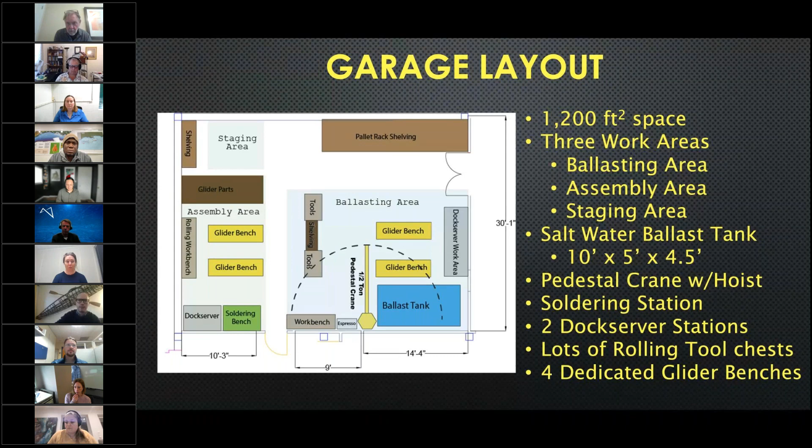This is what it looks like. You can see the pedestal crane there with the half-ton hoist. Our ballast tank, a saltwater tank, we keep covered. Underneath the workbenches we've got dedicated space for the vacuum pumps and tool storage so you're quickly and efficiently able to pull a vacuum when needed, without hunting for the standard tools to take things apart and put them back together.

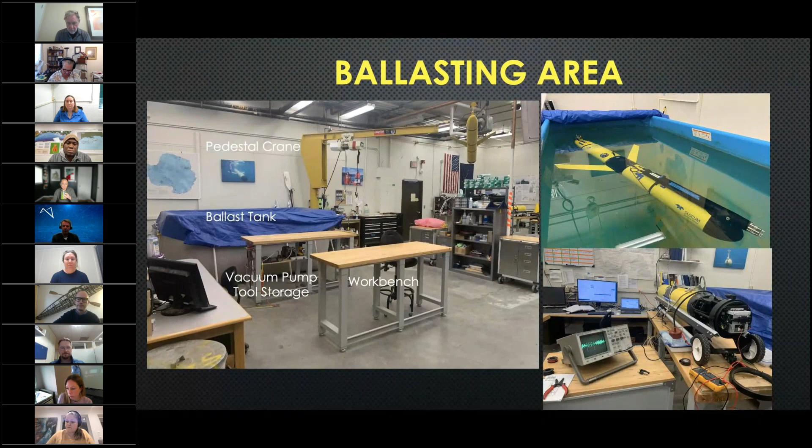In our assembly area, you'll see there are both gliders of the yellow flavor and of the pink flavor. We have small parts bins, a workbench, and all the shelving storage I mentioned. On the right side is the soldering workstation, heat guns, solder, fuses, spare parts, electrical tape and heat shrink. The staging area is dedicated floor space because the glider crates are enormous, and you need a place to put them while getting them ready for the field.

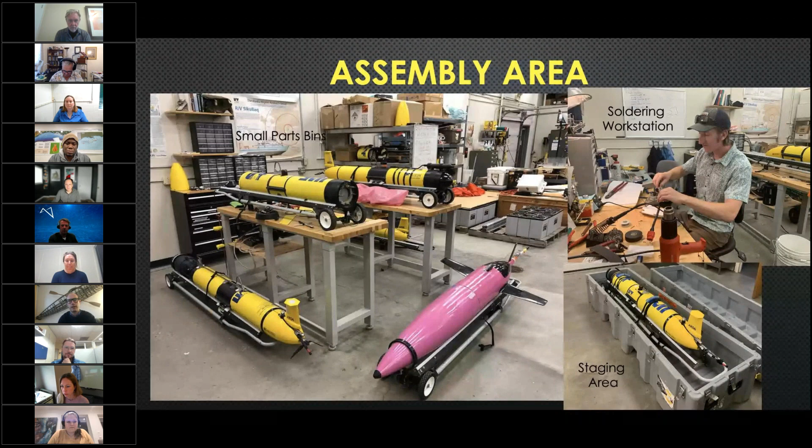If you're a new user, you're probably thinking, where can I find all this stuff? If you haven't been in the industry very long, it can be a daunting process. But places like McMaster Carr, if you look through their online catalogs, have everything you could possibly imagine to set up a new glider lab.

This pedestal crane is the exact same one we bought, had it shipped all the way up to Alaska, talked to our facilities maintenance folks, bolted it down to the floor, and installed the half-ton hoist on it. The total price, including shipping and the hoist, was maybe about $5,000.

The workbenches in my shop I bought years ago at a box store, Sam's Club, where they had just the perfect height and work surface for putting these things together. Places like Costco and Home Depot sell similar products that are fairly inexpensive but perfect for the task at hand.

My ballast tank is an indoor swimming pool with a water filter. I think we bought it through a company called FitMax. Intex and a few other companies sell the same kind of ballast tank. It's very effective—we've had it almost 10 years now. We bought several more that fold up and ship out to different locations if we need to do testing at a remote facility.

All the different electronic suppliers like Newark, DigiKey, and Mouser supply the very specialized tools and components you might need to keep your gliders running—things like fuses, Molex crimp tools, connectors, and all the different wiring harnesses.

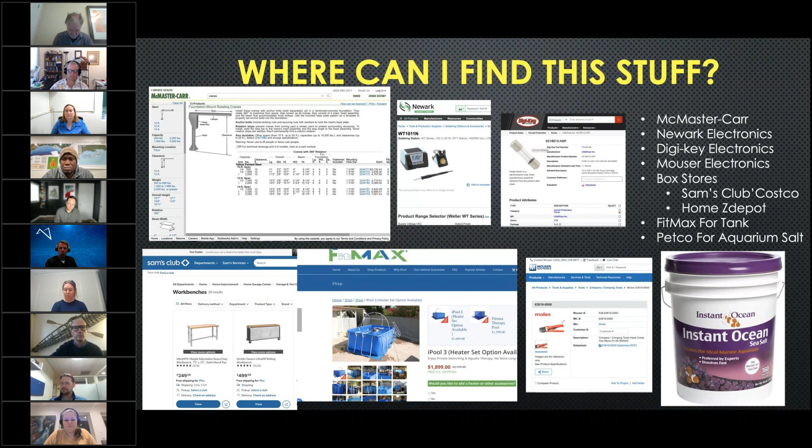So I've been working with a few different companies to design a snap-together HEPA filtration, climate-controlled clean room. They're fairly expensive, I think on the order of $20,000 to $30,000 to put in our lab.

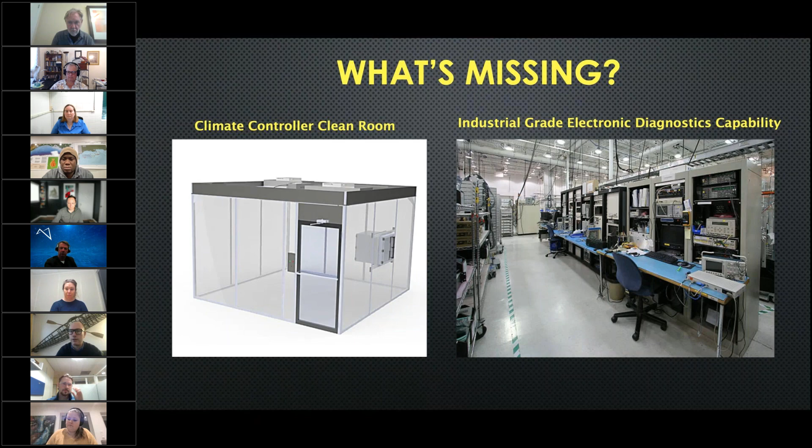And then the other thing that's missing really is an industrial grade electronic diagnostics center. I don't think that my university really wants to see us build something like this out. We don't currently have any laboratory facilities that are quite industrial grade. But I guess I'm going to have to continue to rely on the manufacturers to provide that capability.

And then just to round things out, we actually have one of these things in our garage. But if you know anything about Alaska, it's a pretty enormous state. And I am located directly in the center of the state in Fairbanks. So we have to travel about 400 miles to get to the ocean. So I'm kind of just making a little bit of a tongue-in-cheek joke here.

What's missing is the ocean, but we do have a marine field station, and down at our marine field station, we've got several sizes and classes of vessels. One of my favorites is just this large Zodiac that you can fit 2 gliders in. It's got a nice center console that we can easily get out to some of the fjords and deep basins in the Gulf of Alaska to deploy and test our gliders as needed.

So that's all I have for today. Let's see if I can stop this share. And I'll take questions if anyone has any.

So your facility down by the ocean, Hank, the lab is back at the university. Is that correct? The lab's in Fairbanks, and the marine field station is in a city called Seward, which is about 400 miles away.

Yeah, so every time we want to do kind of extensive testing, we essentially do all the ballasting in our lab and then prep things to get shipped down to the field station. Once we're down at the field station, we have a smaller lab. It's not very permanent, but it's a benchtop space and a ballast tank essentially. But we don't have the overhead hoist and the crane, so it's not perfectly set up at the moment.

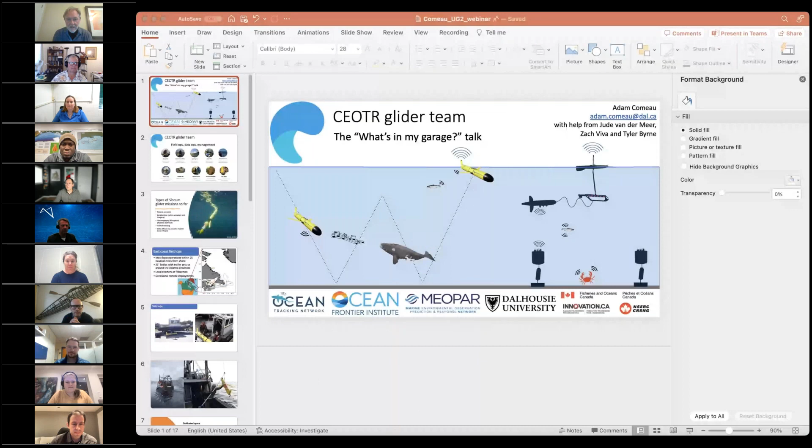Thank you. Thank you very much. Can you see my full screen? Do you see the notes or anything? Yes. I don't see the notes. I see your slide. Okay, perfect.

Well, I'll get started. Well, thanks everybody. Thanks for inviting me. Yeah, so I represent the CEOTR glider team. I manage the group. We're an organization that's funded by a whole bunch of institutions that you can see below, and we do glider missions for researchers.

But what's in our shop? We've got people. We've got a whole bunch of really awesome glider techs. We've got data people and management. Not all these people are dedicated to gliders. They do other technical services for the CEOTR group. But I felt it was important to mention that there's actually a lot of people in our shop sometimes.

And one thing that I'm going to talk about in the shop, you'll see lots of spare parts, kind of like what Hank was saying. Our shop, we do lots of different things. We do passive acoustics, we do lots of zooplankton missions or bio-optical oceanography stuff or animal tracking. And we try to make our gliders multi-stakeholder, so we're always changing things around. So I think that kind of drives why our glider shop is what it is. It's because we had to kind of adapt to the constantly changing gliders.

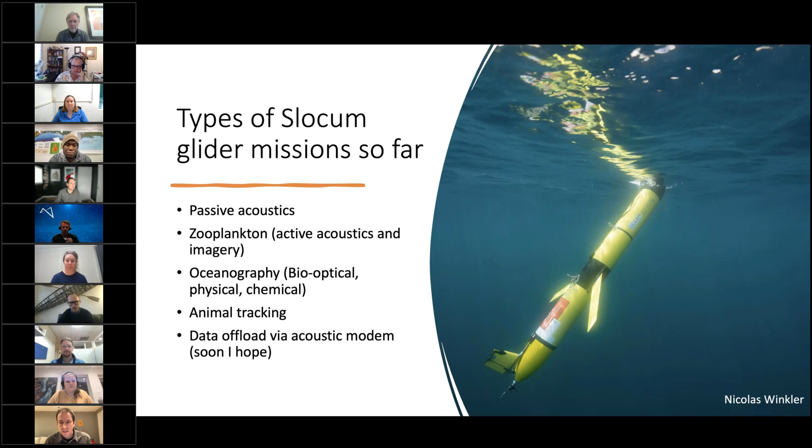So that's kind of the reasoning behind some of the things that you'll see later on in my talk. And then, just for context, another thing that guided some of our decisions is that we're mostly coastal operations. Most of our deployment and recoveries happen along the coast. And sometimes we will farm out a glider deployment to some trained fishermen or something like that.

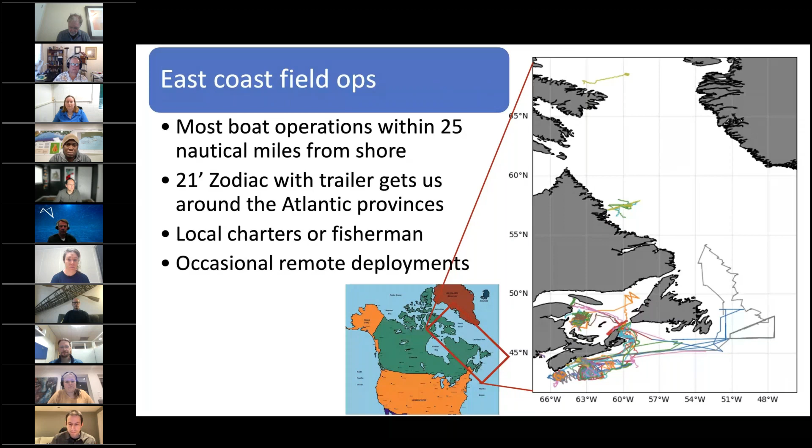This is just showing that sometimes we get fishermen to deploy, when we've got to go further offshore and need bigger boats and stuff like that.

Getting back to our shop, we've got a little bit less space than Hank. We've got 375 square feet dedicated to Slocum prep. We do have a mezzanine, I'll show you a picture of that, it's almost 300 square feet, like a floor and a half. We also have wave gliders that we prep as well in our shop.

We have the same issue with storage in terms of glider crates, those big Pelican crates. So we end up getting some storage shipping containers outside, and we put all of our crates in there because we don't have enough square footage to keep them inside. We also just recently purchased a heated and climate controlled container for storing excess gliders during times when they're not used, especially for the wave gliders, because they take up a lot of room.

It's worth mentioning, don't take these numbers purely - even though they're small, don't say that they're enough. We're constantly overflowing into our neighbors' space. Luckily, they're good neighbors and they don't mind, and they're not always using their space. So that's just a caveat to use with these numbers.

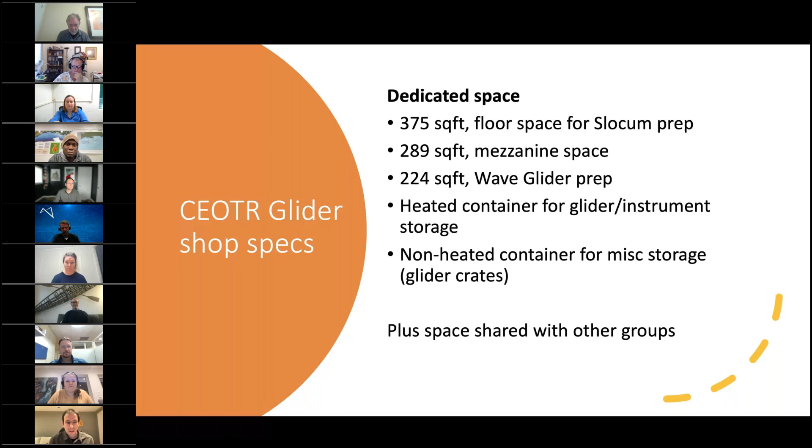So now we're getting to some of the images. This is kind of what we've got. I mentioned we have a mezzanine - this is just like a half level in our glider shop. It's been really good to store spare parts, boat supplies, the lithium battery cabinet, our server, that kind of stuff.

Underneath the mezzanine, we've got the ballast tank, where you can see we've got an electric winch, a hoist system to lift our glider from the ballast tank to one of our tables alongside. This ballast tank is a little over 10 feet long, filled with seawater. There's a little viewport in there, and that's pretty handy when you have instruments in there - one time it came in handy when we had a CTD pump that was clogged or the impeller wasn't working, you could actually look through the hole and see if there were any little particles flying around in it. It's a seawater tank, we have a running water filtration system in it, and we keep it covered because it gets pretty dusty and grimy if we don't.

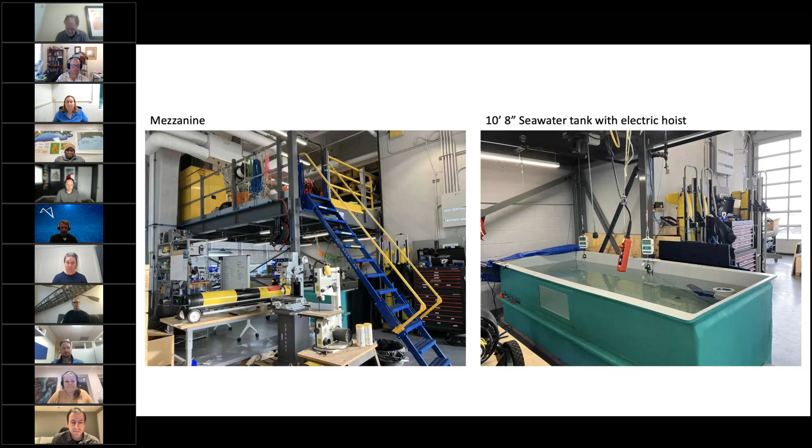Just like Hank was showing, I think one of the big things is storage. We've got lots of storage supplies for spare parts, connectors, wires, stiffener rings, pick points, all that kind of stuff. We've got a whole bin dedicated to Molex parts and specialized Molex pins and crimpers. This table on the right-hand side and our shelving system has got lots of ballasting supplies and scales and stuff like that.

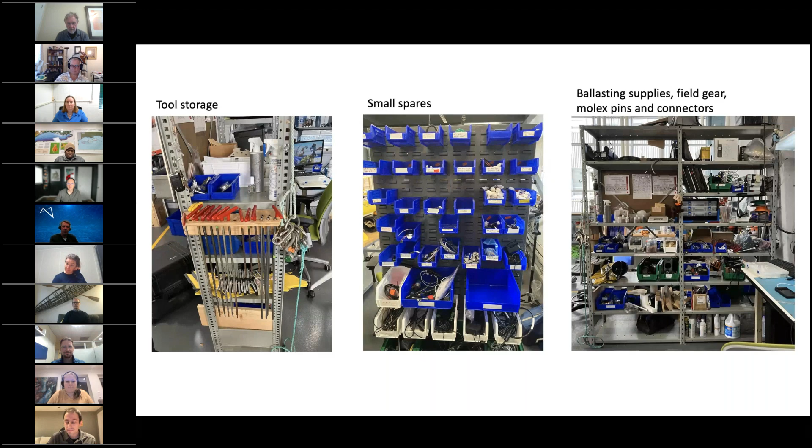We've got lots and lots of screws and hardware. Basically, we did the McMaster-Carr route as well, and we just buy one of almost everything that we need. A really handy thing we got early on - if you look on the left image around the right side, you can see this little weird series of black things, it's just like a ruler to measure out screw sizes, gives you thread count and stuff like that. It's been pretty handy. You can see on the right image here, lots of spares.

We've got spare science bays - that's been really helpful for us, so that if we need to change up the science sensors to do a new type of mission, we can just swap one in. We've got spare instruments, spare hull sections of different lengths for going in different water masses. Sometimes when we need to get the glider lighter, because we're putting in a heavy echo sounder or something like that, we put in a long hull. Spare stiffener rings, all that kind of stuff.

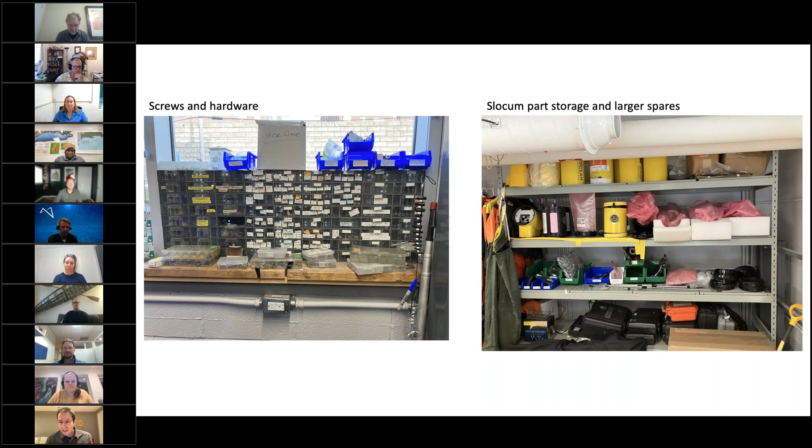We take advantage of our small space by having some vertical glider storage. This is just a picture of one of our racks - we can have 4 of our gliders stored like that. They're pretty easy to get a glider in, you can do it with one person.

It's pretty nice. We've got some 3D printers, as you can see we've got 2 different ones, and we've used them to 3D print little adapters and holders to either go inside the glider or externally mounted, sometimes in the aft cowling, to hold an optode or something like that.

So far, we've had 3D printed parts go down to 1,000 meters, which was a big success for us. We also use them for prototypes before we get the machinist to make a steel one.

We also have a battery storage container. This is pretty handy when we get lithium batteries in. We have a place to put them that's as safe as it can be, I guess, although I wouldn't want to see that filled with fire.

Sitting on top of that is just a big server that we've got. This is our shop server, and it's actually hardwired to several FreeWave modems, so that anytime we turn a glider on, it connects to SFMC, and we can just use it on any laptop connected to the same network. It's been really convenient not to have to do the FreeWave juggle or whatever.

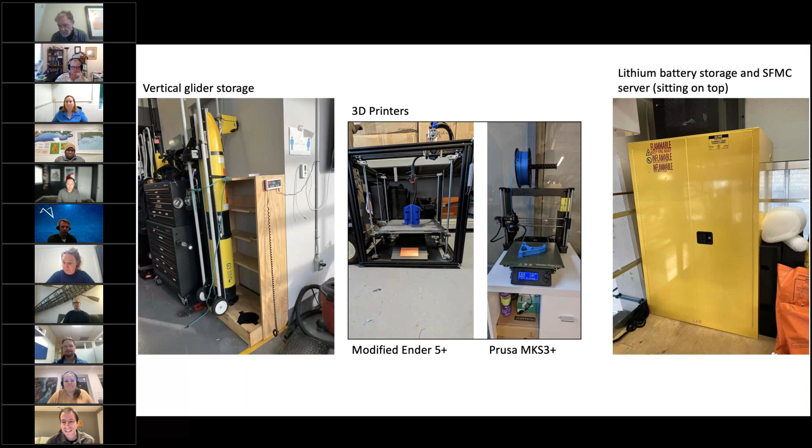Just going through, we've got some new pick point designs. Feel free to reach out if you're interested, we'd be happy to share these. They've been really handy to use as a gaff to recover your glider with.

We've designed these end caps as well that have been good to seal up science bays for pressure testing. If you're ever swapping a sensor in and out of an EcoPuck port and want to get it pressure tested, you can just slap on a couple of these caps and send it off. Luckily, there's a company just down the road from our shop that does this service for us, so it's been pretty handy.

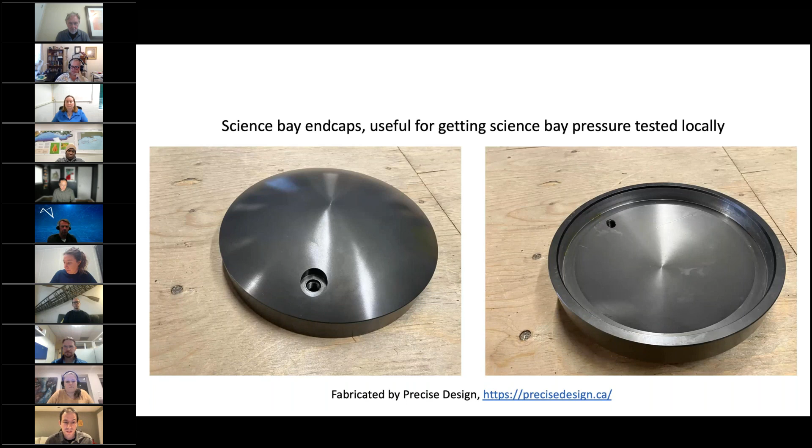And of course, running a glider shop, you need lots of friends, whether it's the pressure testing company or the local vessel charter companies. They've been great helps.

We've got a compass hut, a non-ferrous metal building that the Bedford Institute of Oceanography made for calibrating compasses that go to the Arctic. They've let us use it for Slocum gliders, so we've been able to hang them there and do the dance as well.

There's lots of local groups that have helped us out, including the Slack group here on the UG Squared.

Some of the issues keeping us up at night, just to generate some discussion, maybe in the Slack group afterwards: we've had lots of buoyancy engine leaks, especially with the 200-meter buoyancy engines, so talk to me if you've had some as well. Mission aborts, especially with the new STM32 system. Bias resets with Persistor gliders that led to some dead gliders in the water. And piloting, of course, keeps us up at night because you always get an abort at night.

We've got a new set of regulations that just came through. This is not Slocum glider related, but with our wave gliders. So if anybody's using wave gliders outside of the US, especially in Canada and the UK, feel free to reach out to us. I'd like to chat about how you got around these regs.

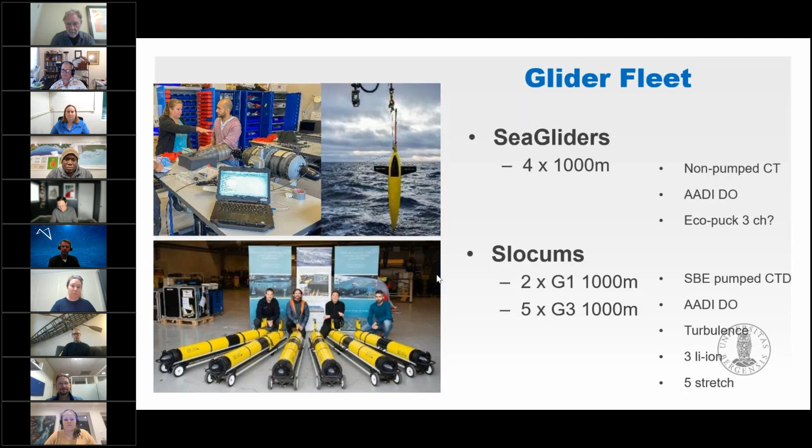So almost all of the Slocums are stretch gliders. 3 of them have rechargeable battery packs, and then the rest will just be the 4S battery packs.

Hey Landry, could you please mute? Landry, you need to mute. Thank you, sorry, I thought that was me for a second.

So I was saying there's a key characteristic of how we run our operations - almost all of our deployments are happening from large research vessels well offshore, and almost all of the operations are actually carried out by people that are not trained specifically with gliders. Quite often we get assistance from the IMR onboard technicians, and these people are fantastic because they have the right skill set, but they don't necessarily have glider experience.

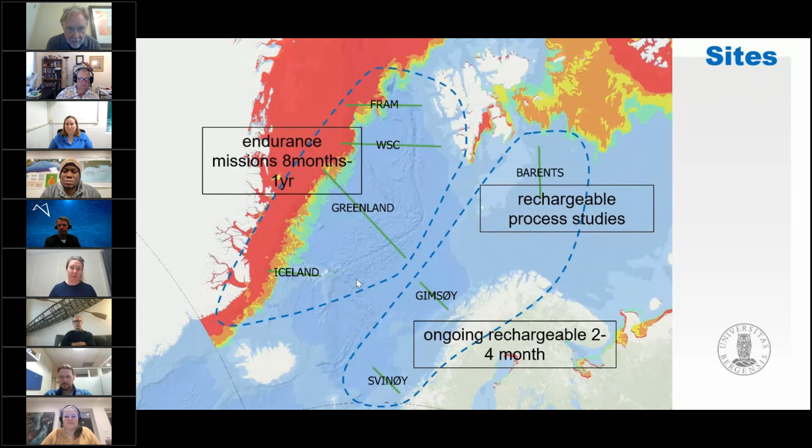So yeah, we spend a lot of time writing these procedures, and we're trying to make them as easy to understand as possible so these people can consume and understand the information as quickly as possible, to make their job easier and to make them more willing to collaborate with us. It also keeps our operational costs down, because we cannot send our own technicians off on these 6-week cruises whenever we want to deploy a glider.

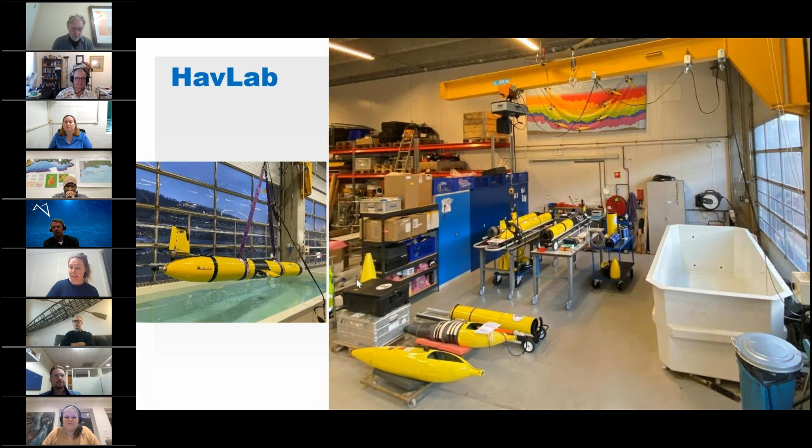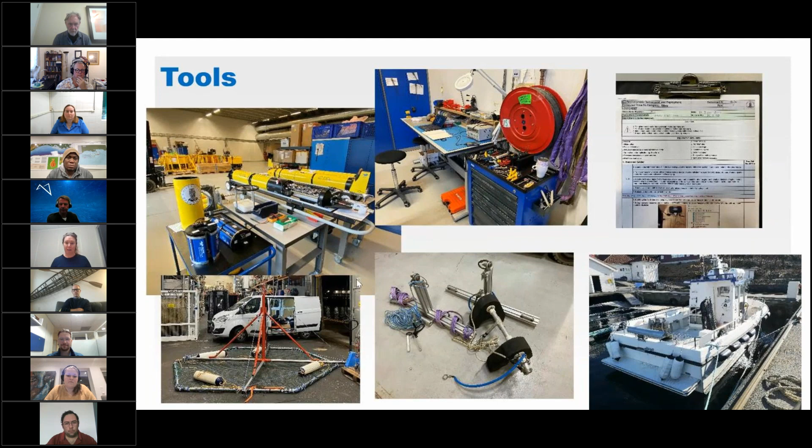On the left-hand side, there's a massive rig we've used in the past for recovering gliders. It's kind of a nightmare, to be honest - it operates really well, but it takes several hours to set up, so we're trying to move away from that. Beside that, we've got several rigs we use for deploying gliders from research vessels.

Field-going toolboxes are very much dependent on who is going to the field. If it's a glider tech, we expect them to be able to troubleshoot and fix a lot of things on the spot. For non-glider techs, we try to minimize the amount of equipment we give them because we don't want to overwhelm them - there's so much new information, and we just accept that everything has to run quite smoothly for the glider to be okay for deployment.

Going forward, I hope I'm not going too far over time, but Hank was actually just talking about this, so I'm jumping on board. We need more technical knowledge, or we need to be able to deal with more advanced repair jobs. I think all Slocum G3 users have been having issues with the HD pumps, and servo motors are always a problem. We need additional training going forward, or just more communication within the group, because people are working on these things.

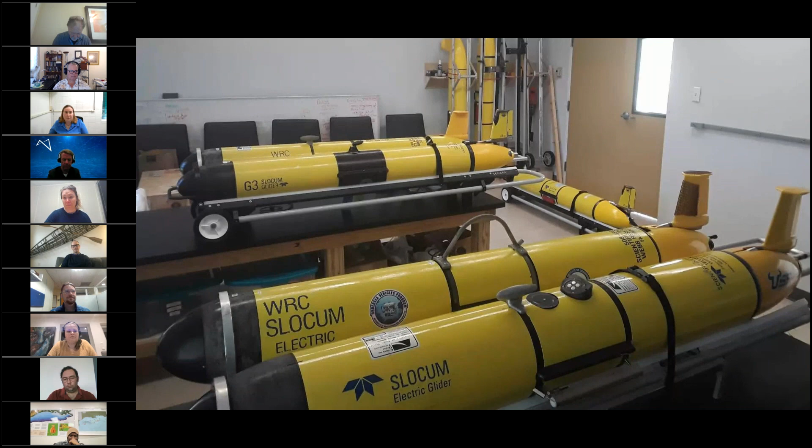Again, we have quite a few partners for our secure missions. We have a pool of about 19 pilots from 5 different universities with varying levels of glider knowledge. That counts PIs that will pilot, technicians, students, interns, and part-time employees.

We'll post a schedule a week to 10 days out with a specific person who's on watch and a supervisor for that day. We utilize Slack to share messages. Whoever is scheduled to be on watch is the one and only person at the helm, who will be sending commands to the glider should it need manual commands during its mission or if it aborts. Other people can log in and watch, but this reduces any confusion as to who's going to talk to the glider.

We also do post mission handoffs or post watch handoffs every day, so we have a status of how the glider's performing and what's been happening. When our pilots cycle in, maybe they haven't piloted in a week or so, they can read and catch up on what's going on with the glider. It also serves as a nice record of any issues or problems the glider is having during its mission.

Our lab is broken up into 2 different areas, a dry lab and a wet lab. This is an image of our dry lab. Our tables are all static, so they don't have wheels and don't move around, but we have bench space to work on 2 gliders at a time. We do have a sink in our dry lab should we need to wash or clean anything. This is where our dock server is housed.

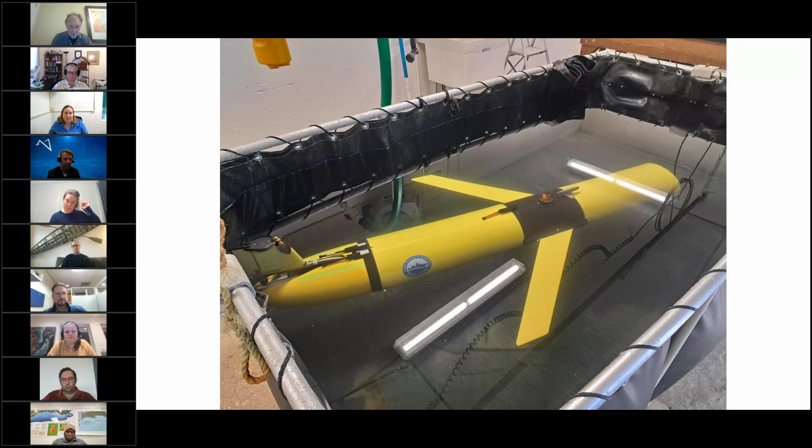One of the big issues we have are pesky remoras in the shallow coastal waters off the eastern US. Ways we've overcome them include limiting the surface area they have to attach to. We have these white colored suits that we put on our gliders, made by a local seamstress. Each glider has its own suit based on the science sensors it has, which are cut out so we can get our data, but again maximizing coverage so the remoras have very little places to attach to.

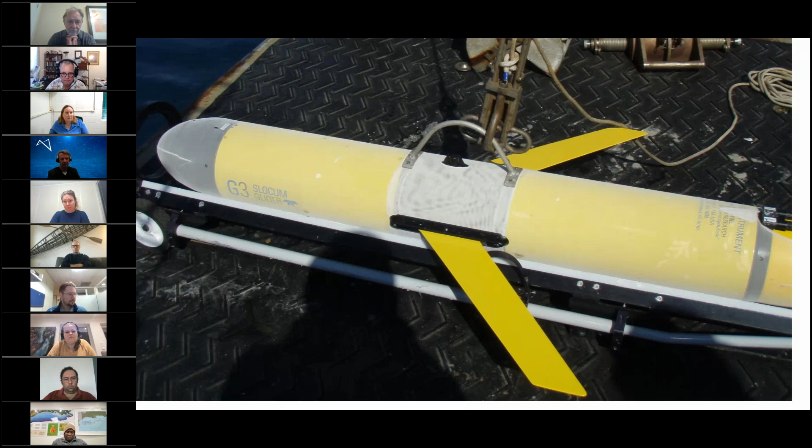Another way we circumvent the remoras is by using mesh netting, like you'll see on scuba tanks or tanks in different labs, that we just stretch over the holes. Again, this limits the smooth surface area for those larger remoras to attach, which then weigh us down and prevent us from surfacing, causing lots of problems. If you don't surface in time, then you blow your weight and your mission is over.

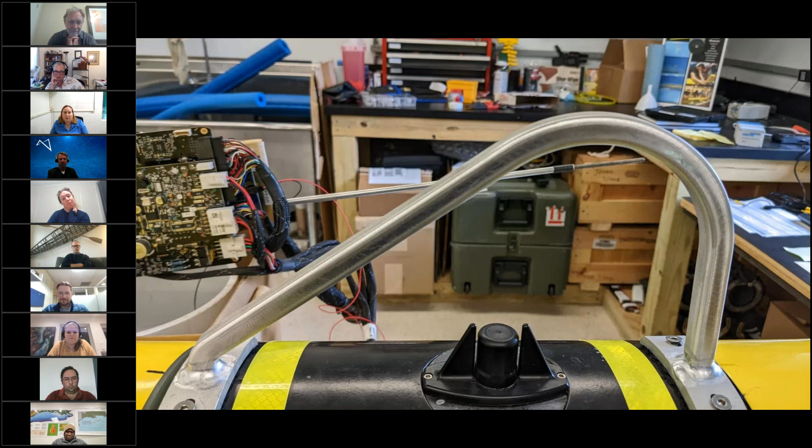Something else we've done at Skidaway is adapt and make our own lifting bails in-house. This is an example of one of two different styles we use, we call this the shark fin. This allows a glider that has a stack-on bay or ADCP payload bay addition to be lifted up but stay level, because the curve of this allows the glider to hang at the center of mass. They're really great for deploying and recovering off large vessels. This is the example for a normal glider with no additional bays, just a half arc kind of lifting bail.

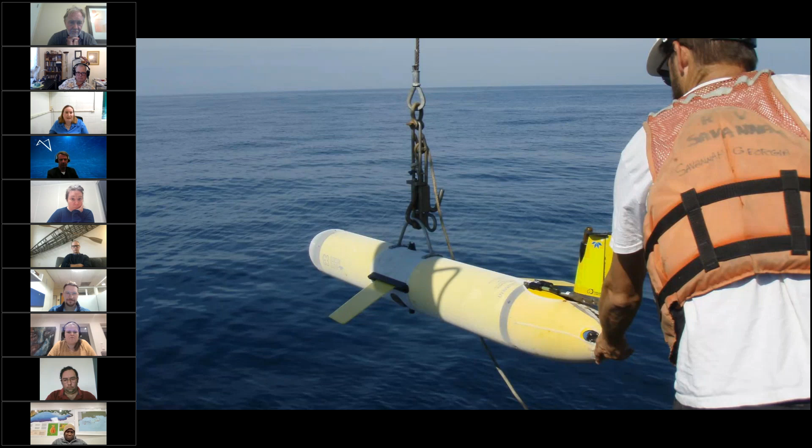Other things we make in-house that have come in very handy are our own glider carts. Part of the reason we make these spare carts is we'll send them to our friends along the coast who may go out and recover a glider without us. They'll just have a glider cart stashed in their warehouse, and if we need an emergency recovery or a planned recovery and can't send one of us, they already have a cart to put the glider on.

This particular glider cart has a stronger base in the back, that triangle shape. We also have another version shown in this picture. Those regular peg legs, like the standard carts, will collapse down so then you just have the wheels, depending on what vessel you're deploying from or how you want to operate. That's the nice thing about having the ability to make extra carts. Extra carts are also nice to have on the bench when you want more space, or if you're working on a glider with extended or additional bays. It's easier to move the whole aft section or forward section to another cart to free up some space.

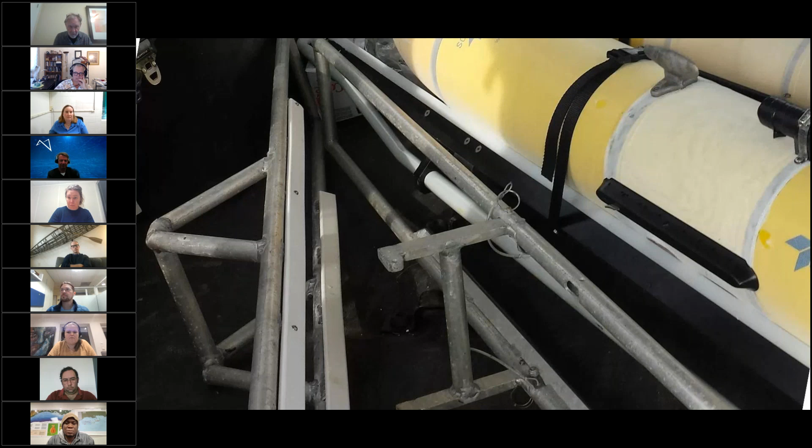Before I take questions, I'll pose two questions to the glider community that our lab has struggled with recently. First, any recommendations or tips for keeping gliders safe during transport? We've recently had some bad luck and rough rides for our gliders. We've had the little buckle straps break off, and we've had gliders slide into the back of the crate and damage the digifin. I'm open to suggestions to make it more secure when shipping gliders. Anyone have good shippers or companies they'd highly recommend? Or if anyone's had a bad experience with a particular company, happy to avoid those.

The second question I'll pose to the group is something we'd like to find a better way to do: how do groups with multiple pilots handle information management, specifically with file changes or MA file edits during a mission across different operating systems and people in different locations? Do you have a good method for a file repository so individual pilots aren't manually editing files, but there are already made files stored somewhere they can grab? We've occasionally had issues with different text editors adding encoding or other differences, and then the glider can't read the file and gets confused and aborts or ignores it for silly spaces or things we weren't anticipating. So those are my two questions to the glider community, and I'm happy to take any questions from the group about operations at Skidaway.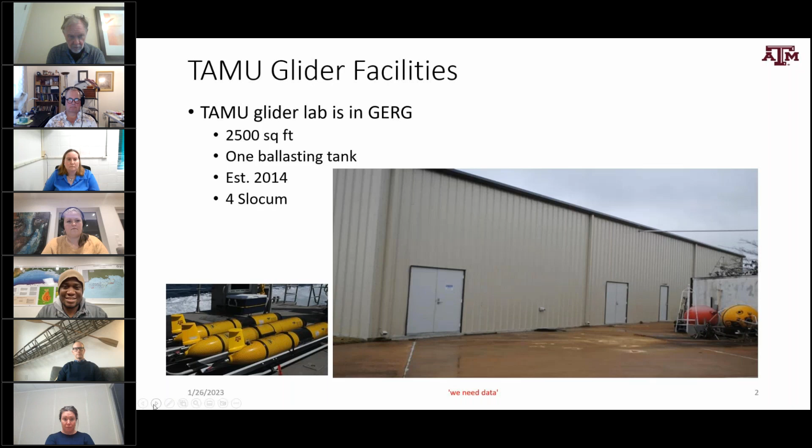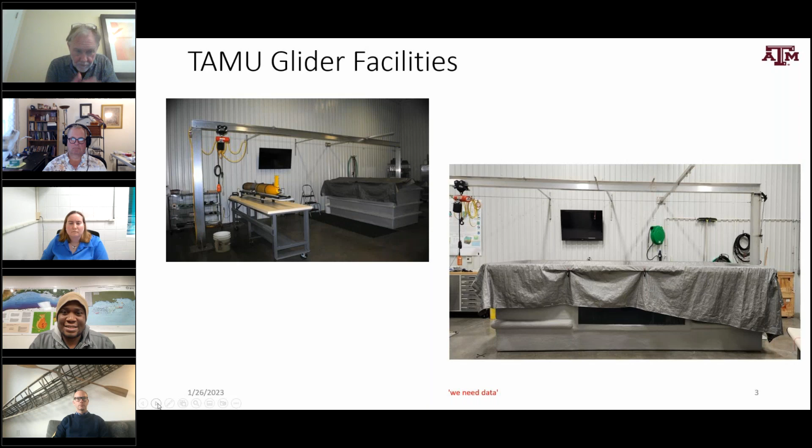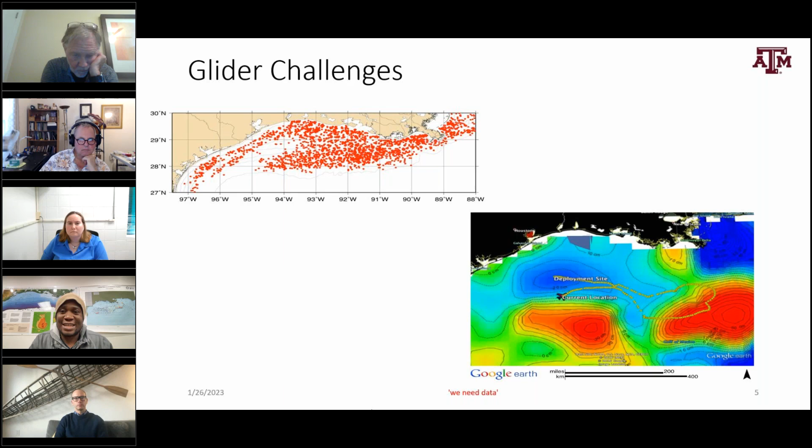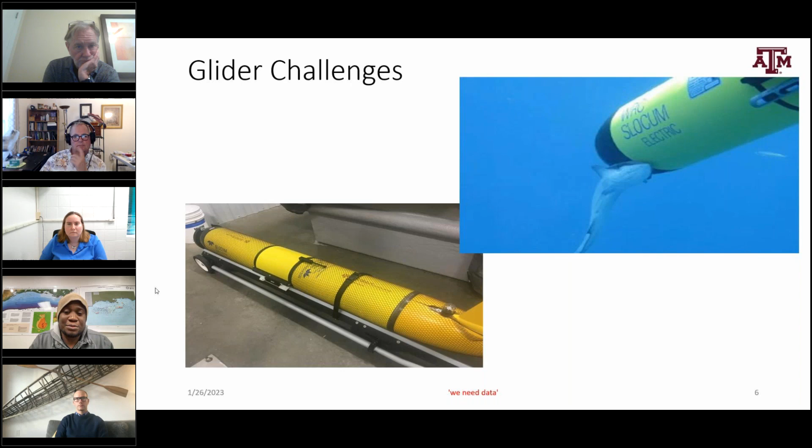Next slide. So Karen already discussed this - we have challenges due to remora fish, which essentially can mess up your glider's diving and rising, or surfacing. GERG also uses nets, so you can see the front and back ends of the glider. We cover them with net to prevent remora from sticking to the gliders. Next slide.

So yeah, this is a pretty short talk. Like I said, it's pretty new, and I'm looking forward to my first glider mission, and hopefully get to meet and know some of the glider community.

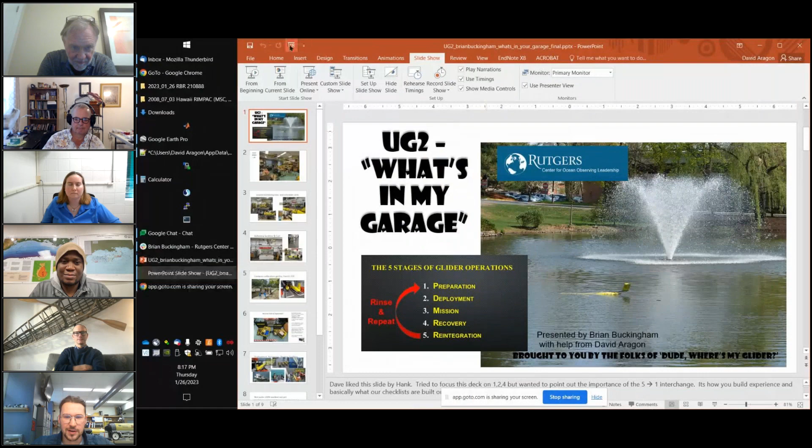I'll be speaking about RUCOOL's glider facilities as well as operations.

I want to give a shout out to Hank Rolfess, because Dave really liked this 5 stages of glider operations. Today I'll mainly be talking about points 1, 2, and 4: preparation, deployment, and recovery, just a brief summary. But I think it's important to highlight going from step 5, reintegration, back to preparation.

Every glider deployment is different, whether that's a new environment we're flying in or a new hardware issue we encounter. So I think it's important to take those lessons learned from missions or hardware issues and share them with the community, reintegrating them into our everyday glider ops.

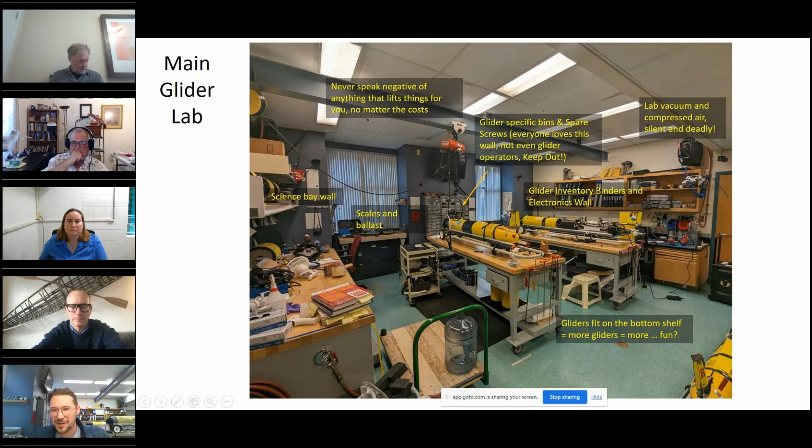Additional things to know about our main lab: we have compressed air as well as vacuum functionality built into the building itself, which helps with ease of access, giving you a near limitless supply of compressed air.

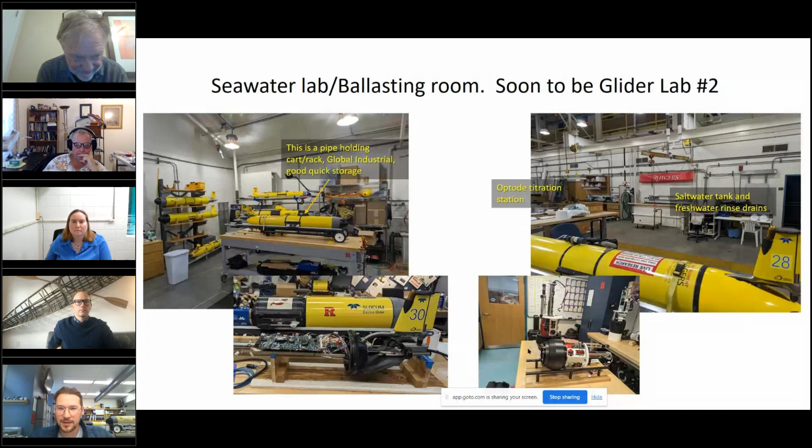Onto our ballasting facilities. We have about a 1,000-gallon seawater tank filled with seawater collected from the nearby coast.

For our ballasting tank, we have another electronic lift to help get the gliders in and out of the water, as well as two arms that can swing over the tank to help hold our ballasting scale so we can do a ballast reading.

Also nearby the tank, we have our Seabird 19 CTD to cross-compare with our glider CTD to make sure they are in agreement. Another nice feature in this lab is that there is a freshwater rinse hose right next to the tank.

So when you take the glider out of the tank, you can just spray it with fresh water to clean off any salt water you have accrued on it.

Another kind of cool thing we have are these little carts, which are very convenient because you can use a lift, load the glider onto the cart, and then instead of having to pick up the glider cart from the back handle, you can simply wheel them around the lab.

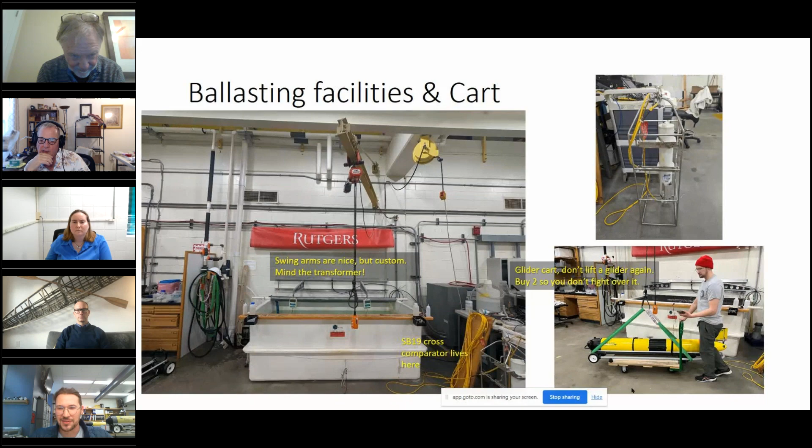So after doing a compass cal, final seal, and checking out the gliders, we're good to bring it down to a dock or a boat to deploy. So how do we transport our gliders to the dock?

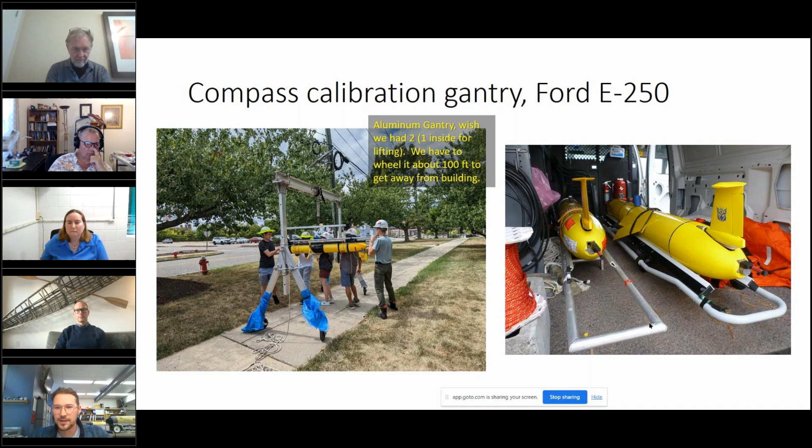We have a Ford E250 van, a utility van that has great utility. Here is the image of the inside. With the cargo space provided, you're able to fit a maximum of 3 gliders if you're really motivated. But for typical deployments, we would only carry 1 along with possibly the Seabird 19 CTD or a small CTD rosette for water sampling, as well as some Pelican cases for the boat.

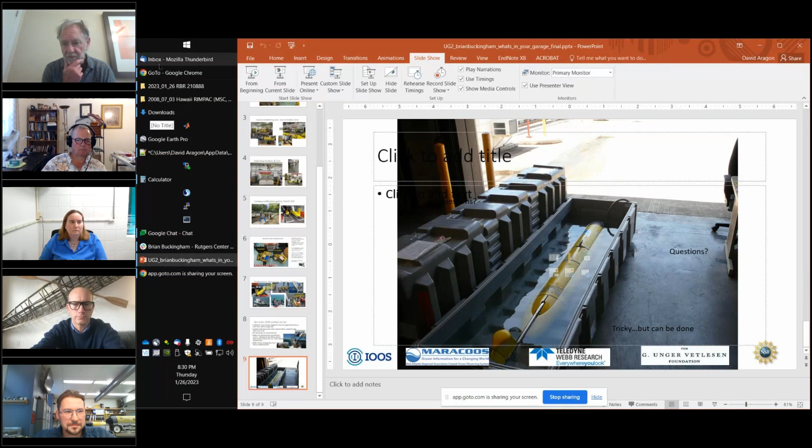First of all, great briefs from the six presenters, that was awesome. The idea is really to help foster collaboration across the community so people can see what others have. If you're a one-off just starting up, you can see what it takes to spin up, or regionally you can look around and say, who has capabilities I might be able to leverage and work with. We had folks from Alaska, the Mid-Atlantic, Southeast Atlantic, Canada, Europe, and the Gulf of Mexico today, so we covered some good regional areas.

I want to continue this, because right now we have Dan Hayes from Cyprus, Jack Barth from Oregon State, some OOI folks, and James Pegg from Canada who are also willing to do this. I want to continue this theme on our next webinar, so I probably won't let it go two months—maybe more like four to six weeks—just to keep this fresh and moving. I think it's awesome to foster the collaboration and keep it moving.

So please use Slack for further communicating with these presenters or with other folks. It's becoming the tool, I really think, moving forward, and we can help refine that, add channels, get recommendations from you as users.